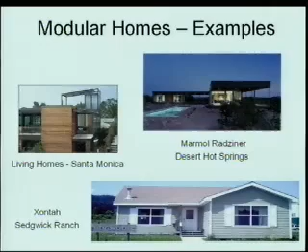They're produced out of Northern California, and that's one that's being now installed in the county at the Sedgwick Nature Reserve. Here's another company that does modular housing, Michelle Kaufmann. Their offices are in the Bay Area. Their factory's up in southern Washington. This is one that was permitted on Pedregosa Street between Garden and Santa Barbara Streets. All of these houses, even more than the manufactured, tend to be transported in box components. That's an interior shot of that particular house.

The overall permitting and quality control is at the state level for modular homes. The state does issue the permits for these, and the state does have inspectors that go to the factories where these are built and maintains the quality control that the state requires. So it's not just where they're made, but it's where they're installed. The state where it's installed has to sign off on it, whether they're produced and manufactured in the state or not.

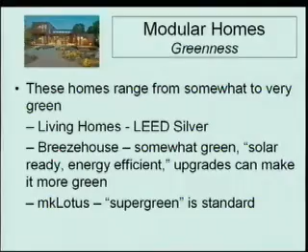Another model that's done by Michelle Kaufmann is called the Lotus House, and its base package is super green. Some of the things that they include in that, they have a green living roof, which I guess you're going to be spending quite a bit of time talking about today. But that's a standard on their base structure. They make that house, in terms of electrical use, 100% provided by the panels on the roof.

They pay a lot of attention to rain and groundwater handling. They have a gray water system that feeds back through the toilet flushing in the house. Again, it's a standard component of that house design. They also pay attention to the materials on the exterior. Usually they're fiber cement, but not always. Fiber cement is a product that we pay a lot of attention to here in high fire areas because basically it's a non-combustible material.

The wall assemblies are made out of SIPs, structural insulated panels, on that particular house, and where the floor and the roof system are not out of SIPs, they use an open cell foam insulation, which is a very good insulating product. They use on-demand water heaters, which are very efficient. They have a super efficient heating and air conditioning system, air conditioning being a part of that only where it's needed depending on the site. And they use high-performance exterior doors and windows.

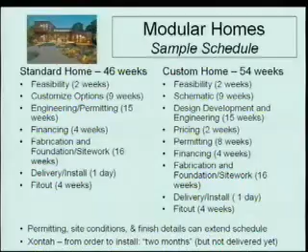Costs for these range pretty much from about $225 a square foot up to $400, and you get into the customs, you can go up to $700 to $800 a square foot. In terms of cost, these are not less expensive than site-built homes, with a few exceptions. If you stick to a standardized design, you can bring the cost down a little bit below what a custom cost would be, and you can speed it up a little bit. The design costs add on top of these basically production costs.

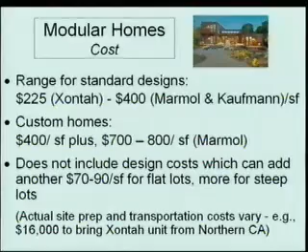So the thing that we experienced on the Pedregosa house was that a custom site-built house would have been right about the same cost. Could have been even a little less. These are a whole different product quality-wise than the manufactured houses we've been talking about. So as I said, you can cut time and cut costs a little bit if you stick to one of the pre-designed packages.

You have considerable leeway on customizing, and the experience that we've encountered, and I think most of the modular home people, is everybody wants to customize it a little bit. And of course that shifts you out of at least one of the advantages of both speed and some dollar savings. The local jurisdiction gets good review on these, not complete, but they have a part of it.

And in Santa Barbara, where it has to go before the architectural review, you can move a window around. You can change the way they stack. You have authority to be able to make those changes and additions. Of course, that often, again, changes the cost and the timelines on them.

One of the real pluses for this kind of thing is you cut way down on waste by building it in the factory. Often these homes will have just a couple big trash cans full of waste at the end of the whole process through the factory. With paying attention to resources used in housing, that's a real plus. I give them kudos on that element of it.

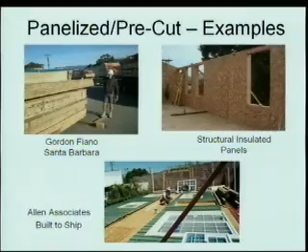The bottom picture here shows basically what a true panelized kind of a system is, where you have all of the doors, the windows, the siding, of course the structure is all put together in a controlled environment, and sometimes even the wiring is put in the panelized systems, and then they're put together and shipped. What we've done in a lot of these is we can get a whole house on a shipping container. And it's because the walls, each of the pieces are separate, but they're big chunks of a

house. And the inspection process does not have to occur at the factory, because all of the components are still visible when they arrive on the site and are assembled. So all the inspections can occur on the site.

These are some examples. These are all local. None of these are in the city, but one was temporarily in the city at the park for Earth Day, the lower right one. The other two are in Montecito. One's on Lambert Road, and the other's a guest cottage in Montecito.

I think the thing to indicate here is with the panelized, you can get the whole variety of styles. You can be contemporary, you can be traditional, you can pick basically any materials on it. This is the interior of the one that was on Lambert Road. As you can see, you can have volume ceilings, which you don't get in most of the manufactured, and you don't get in the modular.

We started the built-to-ship division in our company about 7 years ago, mostly to respond to the housing interest in Hawaii. And it really was designed to respond to areas, Hawaii but other areas as well, where labor and materials were issues. Whenever the surf was up in Hawaii, all the builders would go surfing instead of working on the job site. So it was very tough, and it was a very extended schedule to get something built in Hawaii.

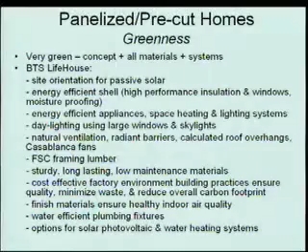I think all of these that we do would probably reach the platinum LEED for Homes standard. Especially in Hawaii, we pay a lot of attention to natural ventilation. We use radiant barriers. These are all standard things we do. We pay attention to the overhangs to make sure that the windows are shaded. Lots of daylighting, etc.

So the advantages of these is it's like a stick-built thing, so everybody's familiar with it. The local jurisdiction, and I think for the city of Santa Barbara, what's of interest is that they have full control of fitting in. You can make these so that they fit the regional architectural vernacular. The manufactured homes never fit the regional vernacular. The other thing is the modulars, to some extent, don't fit the site specifics. These are designed for a specific site.

And in my thinking, that's one of the really important things to think about in terms of sustainability, that you site the building on the property so that you're taking advantage of the solar access, the breezes, the views, etc. Good waste reduction on these. Time and cost can be a little bit below, depending on how much customization a client wants. A lot of flexibility.

The overriding principle that we used in developing this was resource efficiency. To me, that's a very green principle. All of our structures fit the 2-foot modules, because almost all building materials come in 2-foot increments. So if you can stick to doing something that's 16 feet or 20 feet or 24 feet, you don't have to cut materials, so it cuts down on labor, you don't have any waste, and you're getting more square footage. Even when we customize these, we try to make sure people stay within that principle, and that's what helps hold the cost down and speeds up the process.

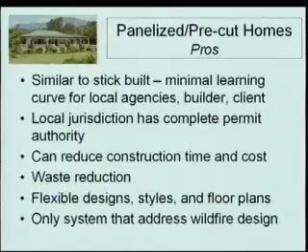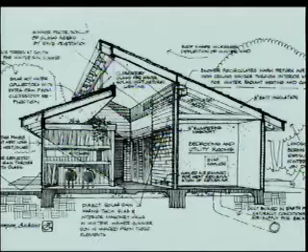This is, unfortunately, a poor copy, but here we see the same principle. The sun coming in, it strikes the surface. If that's a dark tile surface, it'll have optimal performance to help store the heat, re-radiate it at night. And then if we're a little craftier, the heat that's collected on this masonry inside can be collected at the top with a return air grill, pumped down through a rock bin, and then this back portion that would normally be cool can radiate heat at night. So the options are easy and manageable.

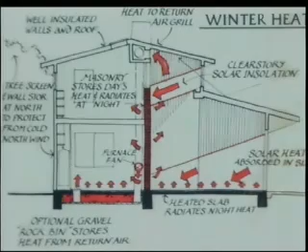Summer cooling, other things happen. Chimneying is obviously a big thing. To have a skylight that's operable, that can vent out heat in the backside, or a clear story. Also, if you reverse this cycle that I told you about and actually pull in cold air from the outside through the roof or whatever and pump it through the rock bin during the early morning hours and charge it with coolth, if you will, during the day that can be pumped up and dumped out of this return air grill at night and filtering down as 60-degree air, we found in many projects.

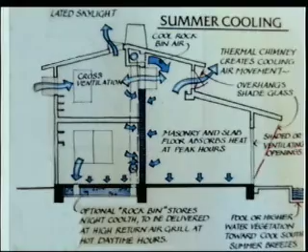This rock bin approach really lends itself to warmer, drier inland areas where you have good heat extremes. In Santa Barbara, we're blessed with this incredibly temperate climate. It doesn't become quite so strategic unless you're lacking other basic passive solar strategies.

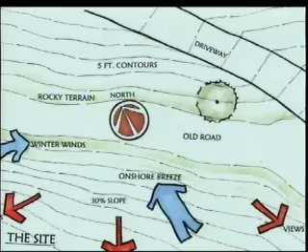This is a site that was developed back in 1986 up on the Riviera, and this is not really a road, but a path that was used to build a house to the left, and these are 5-foot contours, so this building has 30% slopes, and you can see that we were aware of the energies of the site. We had views all around to the south, to the west. We had cool winds coming from one direction. We had onshore breezes over here. And we had lots of rocky terrain back here, 8-10-foot boulders.

Very little natural vegetation. So in order to begin a project, before you do anything, obviously, you need a good green agenda. You need to identify what you are really after in the project. Go out on the site for hours if you can, at different times of the day, if you have that luxury, to get the sense of what is happening there in terms of the wind, all the little microclimates on the site, vegetation, access, all those things, and to get a sense of the place. I think it's good for any design process.

We came up with what is really more a schematic of necessity. Because we were confined to this rather narrow shelf, obviously you have access and you have more of your guest-related spaces, living rooms, that sort of thing, entry, kitchen serving, the dining room, family, and as you go back in the house, it becomes more private. But we did plan in several yards, which is rare on the Riviera.

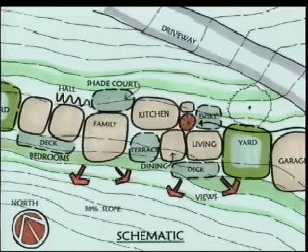But in doing that, we also thought, well, look, aesthetically at least, and in terms of living in the space, wouldn't it be nice if we had a sort of a broken path? In other words, here's a yard, an entry court, a terrace, a shade court, if you will, a portico deck, and a backyard, so that at all points along the way, interest changed, the character of the space changed, because we were really locked into this, what typically could be a barracks-like structure.

At the same time, we'd like to create a pocket, say, for a main living area, because that sheltered it from the northern winds. Actually, it kind of cooks in the summer is the only problem. But we also had the ability to preserve air film, which is about 1 R value in the resistance of heat to go through a building, just by creating a more irregular building profile, vertically and in plan.

This isn't a house that Dennis is going to build and ship to Hawaii, obviously. This is really a whole different piece, very custom. But this is more of the manifestation of what I've just told you. You can see that not only do we have this change of spaces, but we have different angles of the building.

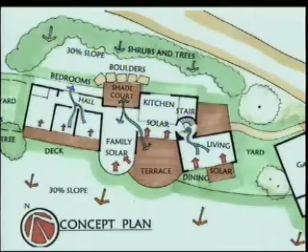And it's been shown that projects that have 45 degrees of south orientations do collect solar, passive solar, but it may be 70% of what they would if they were straight south. So if you're in San Francisco or Santa Barbara on a 45-degree grid, you simply have to have 40% more glass to do the same job. And that does put a pinch on, say, something like a Spanish colonial project, which really wants a lot of wall area versus window area. But I think this is manageable.

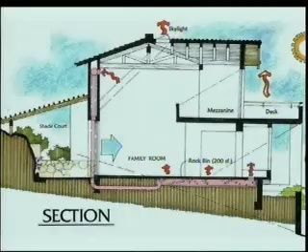We also have a concrete pipe that serves the forced air unit for the backup. We call it an earth duct. It pre-tempers the air before it gets to the furnace. And frankly, it might have cost us $1,500. I don't know that we're going to get a return on that within 15 years. Whereas all of these things we were going to do anyway. It was just a matter of distribution and design to utilize it. So within a year, we had all of our costs paid back on the passive solar aspect of the project.

Another thing that also happened, on a very windless day, with all the thermal rise on the front of the building on the south side, this rocky shade court would produce enough cool to be drawn through the building just by the air moving away here, pulling it out toward the south.

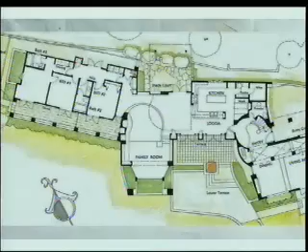Because two of these rooms have carpet, it's the lowest performer, and it probably uses conventional heating maybe 2 or 3 weeks out of the year. The rest, none. So we have a footprint along with about a 5.5 kilowatt photovoltaic system and solar hot water heater. Our total energy bills are about 15, maybe with the gas for cooking, maybe $25 a month on a 4,800 square foot house. So not including the auto use, we're in pretty good shape.

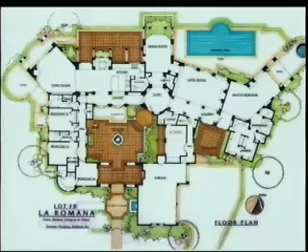And it's also spread out. One of the ideas was a big entry courtyard, another courtyard here, lots of surface area, lots of room for heat to get out. Which is wonderful in terms of a place, don't get me wrong, but it's built up more wall area to lose heat. So what we've done, you can see this is the north arrow here. We have places where we have put in full 7, 8 foot wide elements that relate to solar orientation. We even have a little bit of something here in a little deck, which gives us some protection.

And one of the elements with passive solar is you have to have that overhang. If you don't have that control during the summer, you'll get killed. You'll get too much heat coming in. If you're close to the beach, you won't have to have so much overhang. But if you're in the inland valleys, it's incredibly critical, especially when you come around to more westerly exposures. I think most of us have seen that effect.

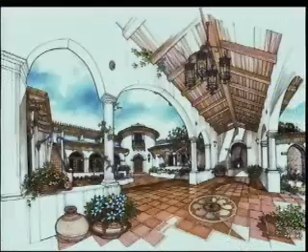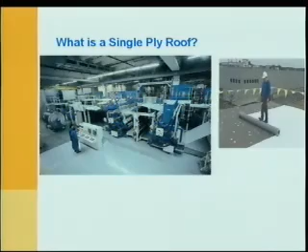Our primary product is single ply, and in this case it's actually a PVC-based product, but there's a number of products here. There's a lot of information here, and I'm just going to go right over it. If anybody's interested, we'll be going into detail on a lot of this after the fact. I really want to hit the Title 24 stuff and some of the stuff that's probably more conducive to what you guys need to talk about in the green stuff.

When we talk about any type of low-slope materials, low slope is 2 in 12 or less. So in most cases, it's all the stuff that you don't see on the commercial buildings that's behind the mansards and everything else. There are a number of different types of systems out there on the marketplace, traditional built-up roofing systems, mod bit systems that have worked very well and still continue to work very well. One disadvantage of a lot of the asphalt-based systems is they're black and they've got to be coated to meet whatever codes there are, and obviously they're tied in with asphalt, with the cost of oil, which is going back and forth.

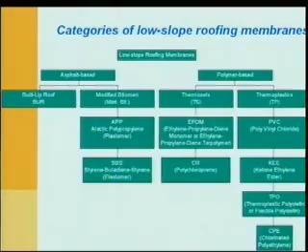When it comes to polymer-based products, there's basically two types of products, and without going into a chemistry lesson, one's called a thermoset, one's called a thermoplastic. One can be welded, one can't, if anybody remembers what chemistry was like from college, which I don't. In the case of PVC, when we talk about green and everything else, there's a lot of issues that come on the table for sustainability. Obviously, one of the issues is we're talking about a product that if it goes in the landfill, it's not going anywhere. And that's one of the key things that we're trying not to do. Other parts that come into play are carbon footprint and what we're actually using to make these resources.

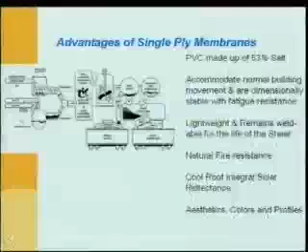In this case, polyvinyl chloride is actually 53% salt and 47% oil. We're still relying on oil quite heavily, but when it comes to salt, there's a lot of salt left and a lot of oceans that have gone away, and there's salt everywhere. So it's one thing that we could say is probably going to be around for a while. These types of products are very lightweight, very suited for scenarios where you can't have a lot of weight up on the roof. There's a natural fire resistance from the chlorine factor, and colors and aesthetics are also available.

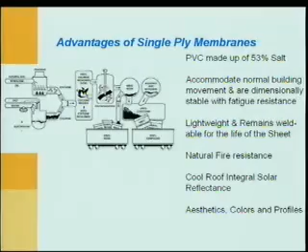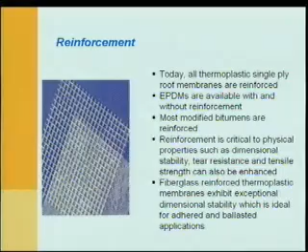One important thing, whether it's single ply or even a lot of coatings, what's now becoming critical when you're looking at these different roofing systems is they are implementing reinforcements more and more. These reinforcements are inside the middle of the product, and I'll pass some of these sheets around, and now they're even using them in coatings where they'll put a layer of coating down and put these reinforcements down. It ties the roof together better and makes a better system. We have been using a number of types of reinforcements for a couple of years, but if you're looking at any systems, make sure there's reinforcements involved.

As in paint or any other types of products, everybody has their preferred formulations. Every climate is different for every type of product. A lot of people actually think that in Southern California we don't have a lot of wear and tear on our roofs. Well, in reality, this is one of the strongest and the worst climates for roofs in the whole country. And the issue is because we don't have rain, we have ultraviolet light all the time, and it's ultraviolet light that has the degrading properties that really tear apart a lot of roofs over time.

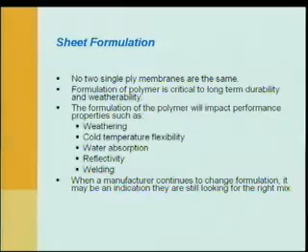It's important, though, when we talk about colder weather, which we really don't have to worry about here, whether a product will absorb water, its reflectivity, which we're going to get into more detail about, and then welding. If I talk about welding, everybody here is thinking of a heat torch, but in most cases on single ply, all the welding is done with a hot air gun. It's actually done at 500 to 600 degrees Celsius, so there's no flame or anything else. It's done typically with just hot air.

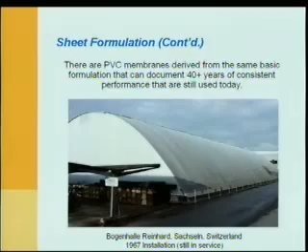This is an example of a furniture shop in Switzerland. Even here in Santa Barbara, I think it wouldn't take much for somebody to want to break into this little place. But this particular building has had this particular single ply on it for the last 40 years. Another positive attribute of good quality materials is even after 40 years, we could cut a hole out of that place and come back and put another patch right on top of it, so you can sustain it for as long as we need to.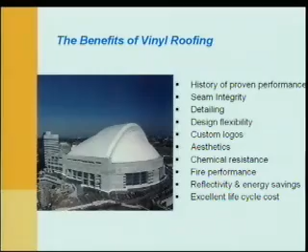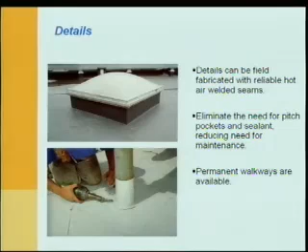Examples of some vinyl roofing for, I'm not sure if that's Toronto, but I'm not even sure if that's even there anymore. But again, an advantage of a lightweight system. A lot of flexibility in these systems. And there's an example of the heat gun that I was referring to, which we call a welding tool. And this is utilized in most all PVC and other TPOs and other products.

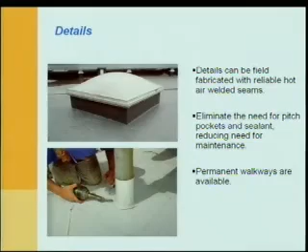Most of these details are actually field fabricated up on the roof so that the contractor makes sure that everything is tight. In most cases, we eliminate sealants and pitch pockets, which are the things that create the maintenance over time. And that's the idea. The less maintenance you have, the longer it's going to last.

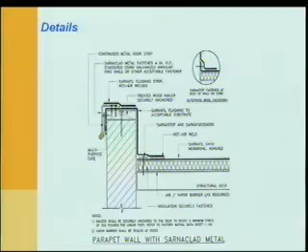Example of details. Details are very, very important, and different manufacturers hold different criteria for warranties. And I don't care if it's built up. It doesn't matter what type of roofing it is. We have the luxury of having the Santa Anas and the Sundowners, which in most cases in our areas, the problems with roofs start at the ends where we have coping and edge metal, and the edge metal peels up and ends up taking the roof off. So it's important when you are looking at different systems, just make sure that the details on the edges are very, very strong, because that's one of your main issues.

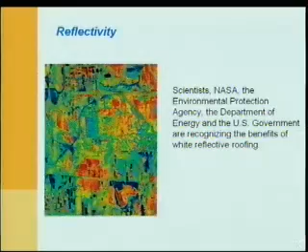Going back and touching base about LEED, and we're talking about our sustainable sites category, getting into reflectivity, which is our urban heat island effect. Lawrence Berkeley Laboratories did a few tests a number of years ago. Phoenix was one of the areas that they did research on. Really found out that where there's a lot of black, the temperature is increased by over 10%. Well, 10% is a lot, especially when you're Phoenix and it's already 118 or 112 or whatever it is.

But the other factor involved is the higher the temperature, the more the particulates for smog come into play. And it happens very, very fast. So they realized very quickly, well, hey, wait a second, we can change how some of this reflectivity works and take advantage of the tops of roofs. Well, obviously, this is a great example when you talk about a big box or something where you have ability to monitor your electricity and see what savings gain there has been. There is a savings gain.

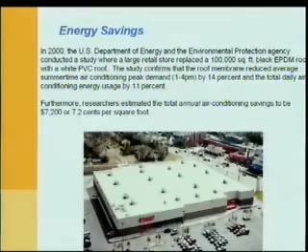That's why Title 24 was affected for the state of California, and where LEED has sort of come in and matched Title 24 rules a little bit, but Title 24 is actually even a little more stringent. There is definitely a savings on electricity, and some people think, when we get into Title 24, what happens during the wintertime? You know, someone's going to come up with a roof that's going to be white in the summer when it's hot and black in the wintertime when it's cold, so it absorbs that heat.

But the whole idea where cool roofs in Title 24 came from is we want to eliminate electricity. And so the heat really is more of a factor than the warmth, which would then, by using gas versus electricity to try to cool down. So that's why even if they consider it a conditioned space building, heated or electricity, it falls under Title 24. Cool roofs. This is basically low slope for non-residential conditioned space, is what we're talking about here. I'm not an expert on the residential, which I know is changing.

This is going in effect August of this year. These changes came about last year. Title 24 is trying to get all the codes and everybody caught up and then basically be in effect as of August. And some of the changes are, number one, they made a slight change in zones. Zone 1 and Zone 16 is Eureka and Lake Tahoe. They decided that Eureka and Lake Tahoe, because of where they're at, weren't affected, so they're not affected by Title 24. Everywhere else is. As I spoke, we are talking about low slope, less than 2 and 12.

Now there is a change here because before that's all they cared about, but now for high slope, we're coming into play as well. One of the new standards also is saying, okay, it doesn't matter what the color is going to be when you put it on the roof, it's what it's going to be 3 years later. So now they've gone to an average 3 years solar reflectance, a thermal emittance of 0.75. Now, what does all that mean?

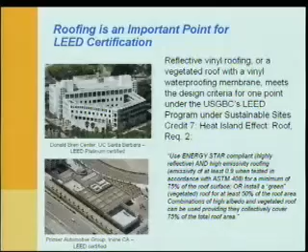The other way that it now comes into play when we're talking about LEED is pre-consumer and post-consumer material. Our products, these are pieces that are made during the assembly line. Of course, it gets blended right in and goes into the back of the membrane. But we're actually now even taking old PVC roofs back, grinding them up, and putting them into the back of the membrane. So that way we can keep them out of the landfills, which is one of the bigger issues.

You really only have one point available to you on the white roof. If you go to a green roof, you only need 50% of the roof to be covered. And then there's a lot of other points, recycled content you can use in overburden and other stuff that I'll talk about a little later, and my counterpart will talk more about this afternoon, that would give you a lot more LEED points than the 1 point from 7.2.

Life cycle costing. Any system that you look at, the idea of sustainability is, hey, the longer it lasts, the better it's going to be. So by looking at systems that in the beginning aren't going to last as long and require more maintenance, more time, versus systems that are more expensive up front that last longer.

Warranties are also something else that is very important. That piece of paper never keeps the water out of the top of the roof. It's a combination of the right specification, the right contractor, and the right product that does that for you. But make sure that you check your warranties. Some have wind coverage exclusions, ponding water exclusions, things like that. Others don't. There's a lot of differences between them, and they are important.

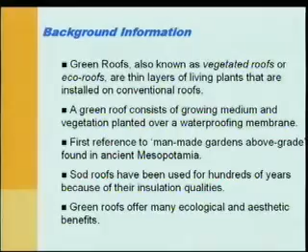A green roof consists of growing medium and vegetation planted over a waterproofing membrane. This is what the membrane looks like, and we'll get into detail as far as drainage panels and stuff like that this afternoon, because again, this is a very shortened reference.

They've been around a while. Mesopotamia is when these things started, the Hanging Gardens of Babylon. So it's definitely not something new, and maybe now it's coming back into a little more focus. Sod roofs, and then the ecological and aesthetic effects of a lot of these roofs, they're there.

We have some challenges here in Santa Barbara that I'm going to address. I mean, we're in a desert. These things work out really well in the Northwest and other places. So there's other things we've got to look at as far as being challenged.

But if we're talking about green roofs in general, it's basically broken into two categories. And I don't like the semi-extensive category. It's basically extensive or intensive. In general, extensive is 6 inches or less of overburden, and intensive is more than 6 inches.

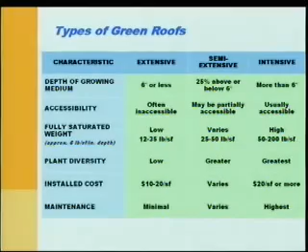It's a difference between having very simple plants, sedums, and we really don't like regular grasses, to be honest with you, versus actually trees or shrubs and all that stuff. Obviously, when you start doing that, there's a lot more weight involved in the overburden soil and drainage, and the live load with the water in the soil itself.

Example of a basic extensive green roof. Mm-hmm. The building? That's exactly it. It's a parapet wall that you'd be looking at, and it just falls right off the top.

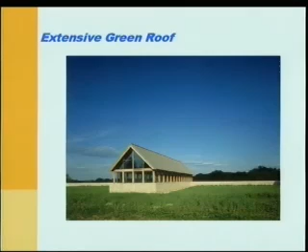Now, having said this, again, we're sort of in the desert, and we're actually working right now on some xeriscape type of roofs, because if we want to be LEED, we've got to try to use the plants from right here, the local area, and we're trying to cut down on the water usage.

So there are aspects of these types of systems, and another thing that comes into play is watering. There are a lot of ways you can water from the top, or we have a way that you can water from the underneath side so that you don't lose water to the environment.

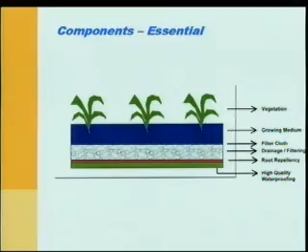Typically, this is what you're looking at: your vegetation, a growing medium, some sort of cloth, drainage panel, the main waterproofing sheet, and then a secondary sheet that usually sits on top of it. This is a detail of a project that's locally down in Hollywood, and it gets more into how we set some stuff out here in Southern California.

One thing is we do like to initiate a drip line underneath the burden. The reason for that is twofold. Number one, we're in a desert, and so by sprinkling water from the top, you're only getting, depending on the day, 40 to 60% efficiency of the water. By doing this, you're keeping the water down at the base, and we're not losing water into the environment.

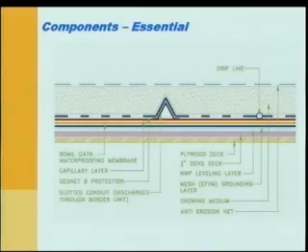The other thing is it has a great tendency of keeping the moisture down low in the soil, which is important, because if the moisture's at the top, all the seeds that fly in from the mountains are going to grow as weeds on the top. So in this case, it keeps the top of the soil dry so that we don't have as much weed impact, yet you're still getting the proper amount of water to the type of plants you use.

Again, typically we like sedums. Sedums are very easy. Grasses are very tough to work with. But being in Southern California, we're really trying to come up with things, and we're working with some landscape architects on some plants that we can utilize out here that make more sense in a desert environment.

Again, a cross-section, basic example of a concrete deck, membrane, drainage panel, in this case, insulation, and growth. We like to have the insulation typically down below. One thing about our company in Boston, where all this stuff comes from: the vapor drive is opposite in Boston than it is here in California. So a lot of times when it comes to vapor barriers, we switch insulation and vapor barriers around because they don't make sense here.

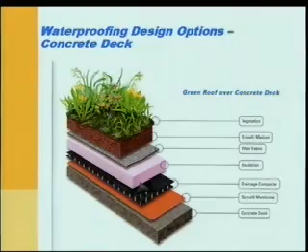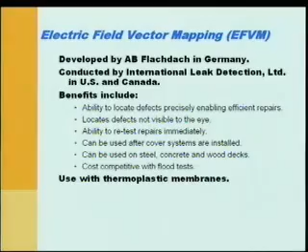The other big thing is, okay, what happens when we got a leak? We got to deal with a leak. Well, one nice thing is we do have this in bright orange so that hopefully if somebody digs down, they see something like this, they realize, wait a second, I better stop. But we have a technology from Europe, and this is a real fancy screen. Probably came off somebody's back door, but real fancy. They take this grounding screen, and they actually put the grounding screen down below the membrane.

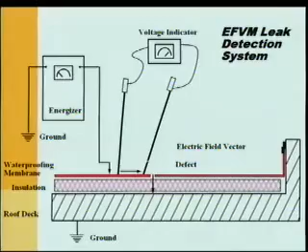And what we can do is using EFVM, looks to me like some fancy divining rods, but it works really, really well because it takes you right to the point where water is breaking that ground and tells you exactly where there's a spot. When we're dealing with basic roofs, it's one thing. When you start dealing with a lot of planters or intensive roof gardens, tearing up a lot of trees to find a leak can be very, very costly, more costly than most people want to spend. So this is one system that makes it very easy, if there is a problem, to locate the problem and get it fixed.

We haven't, but setting up a cistern system for your stormwater and turning that stormwater back into your non-potable water for your plants and everything else is another way, and there's a possibility of maybe even an ID point, innovation and design point, by setting up cisterns or something along those lines. So there's a few other points. If somebody wants to make the investment in something like this, there definitely is a way to do it.

Also, in reference to LEED, I think one of the most important things is you start the project as early as possible. There are so many design points available in the design process in the very beginning, and the few projects I've been involved with, it's always taking a shell or something that's already there and trying to figure out, well, we already got this, now how do we do it? So if anybody you're dealing with is thinking about this, start thinking the design process now, and the points are a lot less expensive than trying to change them after the fact.